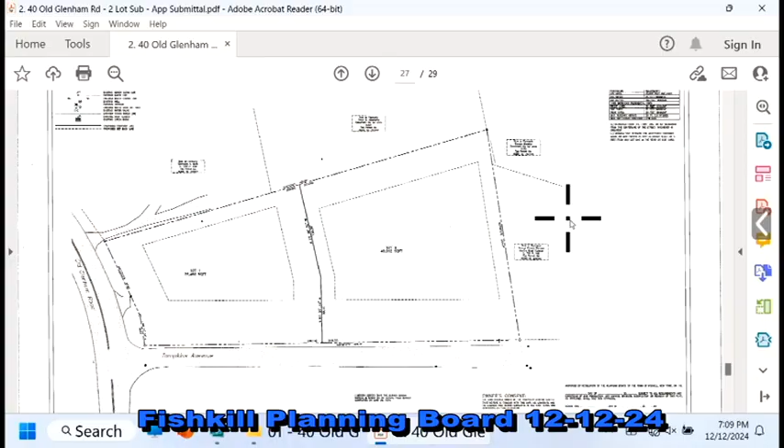Okay, thanks. Any questions from planning board members at this point?

All right, what I'd like to do is see a show of hands if there's anyone in the audience who would like to speak at tonight's public hearing. If so, I will read the rules of conduct for public hearings. I see a couple of hands, so I will read the rules and regulations for public hearings.

Speakers are asked to come to the podium and identify themselves so that their name may be entered into the record. Speakers are limited to 1 turn at the microphone and no more than 4 minutes, with a warning when 1 minute is left. Speakers should provide only new or different information; repetitive comments are discouraged. Speakers are encouraged to submit comments in writing so they can summarize during the hearing. Comments are limited to matters involving the business before the board at tonight's hearing. Verbal interruption, shouting, or other outbursts or obscene language are prohibited. That's good for now.

So there were a couple of hands up. Who would like to come up first to the podium? Again, please give us your name and address when you come up, and speak into the microphone if possible.

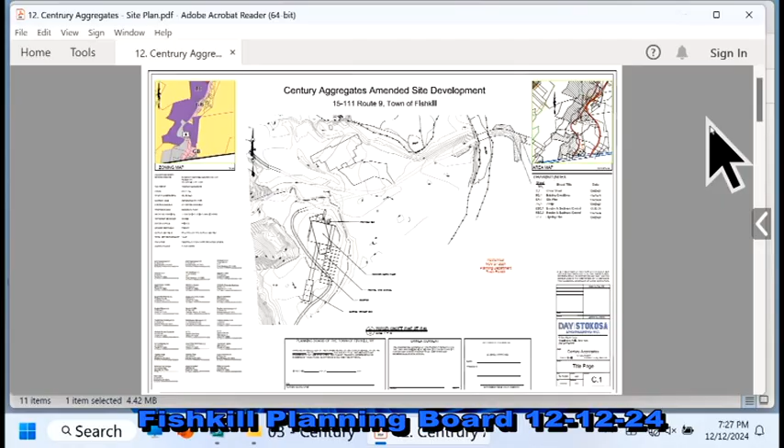Okay. And I'll mention that we did have a pre-application meeting with the applicant team probably a couple of months ago. So any questions from planning board members? No, not right now.

Yeah, this first meeting is really to accept and refer the application, so our consultants haven't had a chance to look at this yet.

Let's see, I'll give a couple of thoughts, and we talked about most of this at the pre-application meeting, but the entrance of the proposed facility being directly across from Carroll Lane will have to be particularly aware and sensitive to any possible impacts on that neighborhood, so that'll be part of our review.

I think we also brought up the question of whether state DOT might want to look at the traffic situation on Route 9 and see whether speed limits might be adjusted there, and or the possibility even of the installation of a new traffic signal at that intersection, which is now going to be used for more heavy-duty purposes than in previous years.

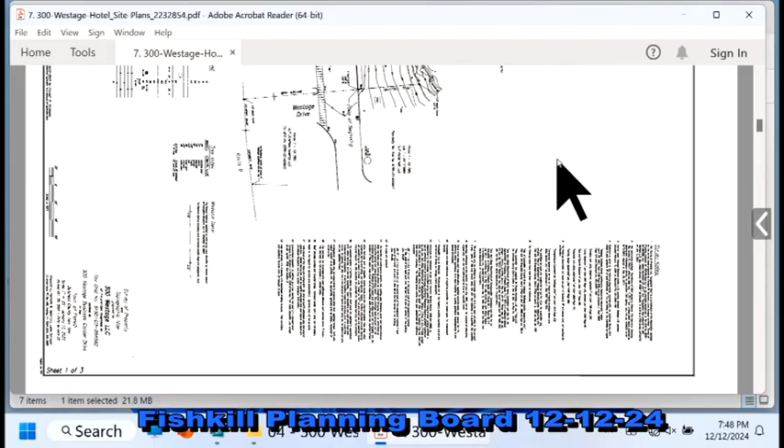Just to give a brief overview with the plan up: this project is located at 300 Westage. There's an existing 117,600 square foot office building that will remain as is.

We are confining the project area to a portion of their existing parking lot. This would be the southeast corner of their parking lot. Before we even got into this process, we did do a parking study because we knew that would be the driving factor here.

That parking study was submitted to the board. It's contained within the traffic study, which I'll also briefly summarize for you. The parking study was done earlier this year before school let out. The result of it was the existing office building uses, at maximum, 123 parking spaces.

Just to describe some of the decisions we had to make during the parking study: we understand you don't want to drive into a multiple hundred parking space parking lot and need to find that last space. So we did do a couple things that we think are a little conservative, just to give us a little bit of breathing room going forward.

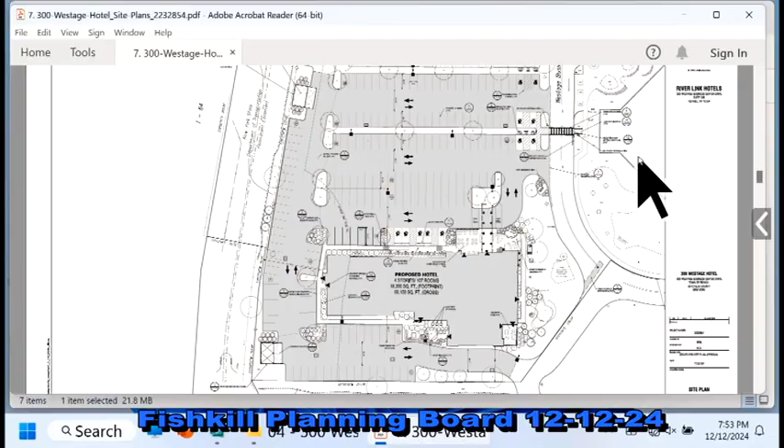As I also mentioned, the outside perimeter is fully within the existing parking lot. We have two landscape berms here, similar to the existing parking lot. We're replacing the trees that are being removed for the construction. Impervious coverage for the project is actually reduced from what's out there currently. It's a redevelopment project by definition, and we think there are some minimal impacts as a result.

We did do the traffic study, as I mentioned. The long and short of it is the build versus no-build scenario: the maximum increase in delay for any of the movements is less than one second.

And the study did take into account several of the other projects proposed for the area. So we did have the Continental Commons project, the warehouse proposed next to Home Depot, the Snook Road Medical Park, and Chick-fil-A.

I think those were just the main things we wanted to touch on tonight, knowing you guys have not accepted the application yet or reviewed it more thoroughly. So yeah, I think that's all we have. Neil, did you want to say anything?

Sorry, good evening, good to see everybody. I think the only question is, and I don't think you usually do this, but we acknowledge it's an unlisted action, so if you wanted to start the circulation process for lead agency, we'd be comfortable with that, but it may be premature, so.

We would normally wait at least until the following meeting, assuming this is referred to our consultants. That gives CPL an opportunity to review the EAF and make sure there's nothing missing, not to say there is, but to confirm that and provide them the opportunity to comment on the application and any adjustments that might be made prior to circulation.

And I think we'll probably want to be specific on the referral to CPL to make sure that the traffic engineer will take a look at the parking and traffic studies.

So there's 352, I believe, existing. We are reducing, of the 352, throughout the whole workday, the maximum use is 123. And then we took that number and said 123 parking spaces. So at its most utilized point of the day, they're only using about a third of their parking out there.

Yeah, so there is market demand. To go back to the height, real quick, 43 feet is well under the zone, which is 70 feet maximum. We did contemplate a smaller footprint hotel that was 5 stories, but our opinion, and open for feedback, was that a lower height consistent with the other hotels and other uses in the Westage Business Center would probably be more appropriate. So that's the main reason it's pushing us into the rear setback.

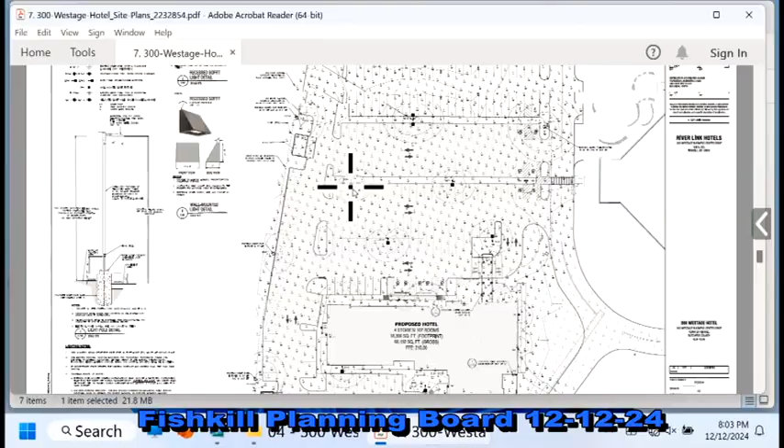And actually, thank you, because I meant to bring that up earlier and discuss that setback a little bit with you guys while we're here. It's just easier to see on the site plan, so excuse me real quick. There we go. So you can see here the setback is measured from the property line, obviously.

In this case, I-84 is located just south of the site, which, when you're looking at the plan, is the left side. The on-ramp to I-84 from Route 9 is located... sorry, this keeps popping up. It's essentially a curve that then connects to I-84 as an on-ramp.

The property line itself does not follow I-84 with a consistent offset. It juts into Westage here, but within that area it's essentially vegetation. So as far as maintaining a buffer to the property line, or to I-84 more specifically, if you were to draw a straight line, or even a curved line, it would give us even more space. With that straight line, you'd get a 100-foot offset for your setback, and we're outside of that. So the only reason we need a setback in this case is because this property line isn't shaped to follow the actual location of the highway.

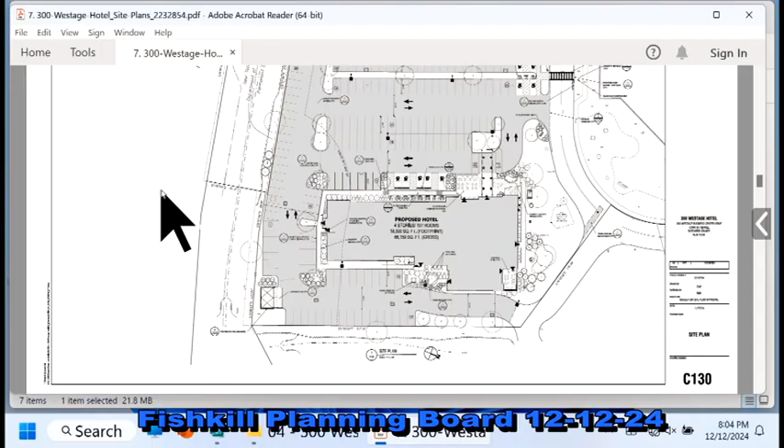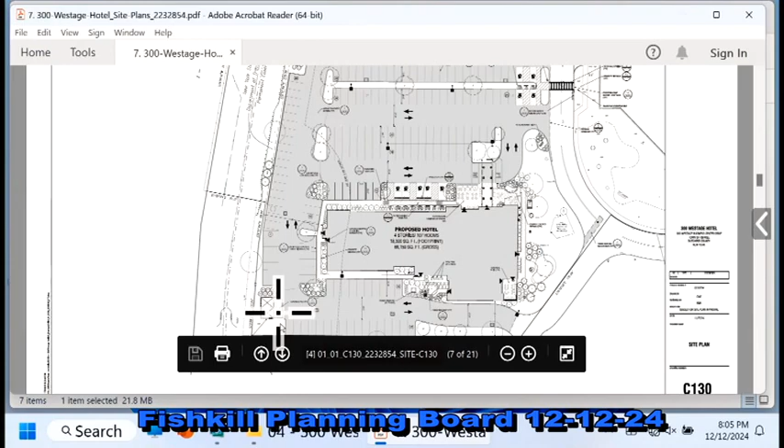So we'll definitely discuss that further and can provide figures that show it a little more clearly. But that's essentially what's pushing the building into the setback. If this setback went straight across the back of the property line, you can kind of see it here, it would come straight down within the drive aisle. I'm trying to just extend it from here, the rest of the setback, I should say.

So, if you want the applicant to speak more on the market need, he's probably a better person to talk about that than me. But I don't think the question is necessarily about parking. No, I meant the need for a hotel. Oh, another hotel? Yeah, yeah.

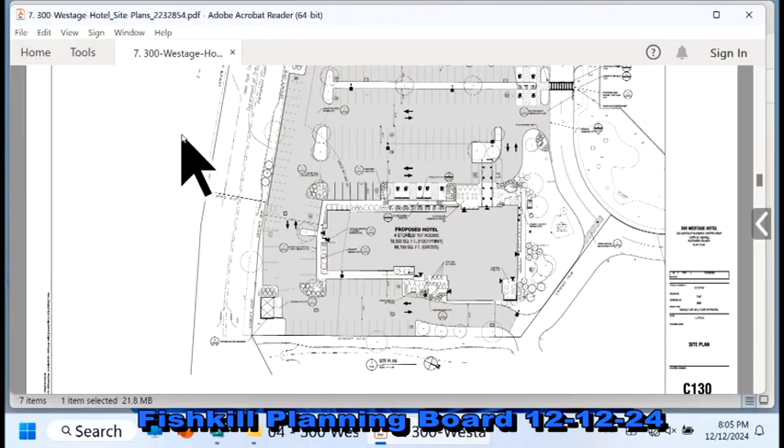Yes, it's a permitted use. Can I ask you about parking, because it goes back to parking? Sure. Because it's a homestay hotel? Home2 Suites, yes, which means they stay there for a longer period of time. Will that make a difference in the parking? Because a normal hotel, they're in and out,

and then you have that big gap during the day. No, it doesn't have much of an impact on parking. You'd think extended stay means they're staying a much longer time, and there ends up being longer stays, but only by about a day or two. Well, I was just thinking about parking though. Right, yep, it's a similar pattern as far as parking demand goes.

That whole side of Westage is going to be built up eventually. We have a lot going on over there. I just wonder, if we could fast forward, everybody in the town of Fishkill should be thinking about this. If we fast forward 5 years, when you're driving down 84 coming into Fishkill, what is it going to look like? We have potential storage units, the Gap, now another hotel, industrial complexes on the side. I just wonder, are we putting too much in a small space? It's a 5-pound bag. Are we putting 20 pounds of stuff in it?

Well, in this case, I'm very concerned about what Fishkill's going to look like in 5 years, 10 years, because a lot of these projects haven't even gotten started yet. Yeah, I can appreciate that, and that's, I mean, we think this is actually one of the best things about this project.

As I said earlier, the parking on the western side of our parcel that is on the 400 Westage property, we included in our count. So that is counted as office demand, even though there may only have been a couple people using those spaces that were going to the office, and the rest may have been to 400, but we didn't sit there and say, where are you going? So we just assumed anyone parked in those rows was going to be counted with the office.

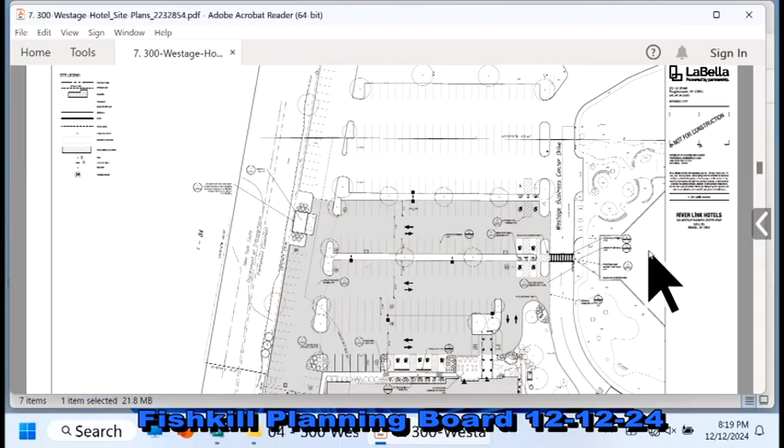And at the same time, anyone from 400 Westage who was using the parking over here was also counted with the office, because again, it was just any car parked within these spaces was assumed to be for the office. So I think that adds another layer, as I was saying before, we know we don't want to be 100% parked at any point. No one's going to be happy with that - the hotel, the office, anyone utilizing those 2 buildings won't be happy with that. So we did try to make conservative decisions every step of the way, where we could have gone with a different approach, but we didn't. But yes, more to discuss.

I just thought of this as we were exiting. Maybe it would be appropriate, even at this early stage, to let LaBella and CPL talk, especially as they're going through their review, to make sure that would be appropriate at this early stage. I think it might be helpful as to the advice you could get from your consultants on this issue in particular. Well, I think we'll wait till the next meeting to do those kind of things, because we haven't even referred this to our consultants yet.

Okay, but continuing on this talk about shared parking in particular, will there be some kind of legal agreements with, well, certainly with the 300? Well, it's all part of Westage, so it goes back to the Westage Association and the 5 or 7 amendments. So it's all encompassed. As you know, it's all one big, huge integrated site plan for the whole. So Westage obviously has to sign off on what we're doing as an association.

Bobby has an agreement with the building owner of 300, who owns 300 as a whole, right? They own all of this. That's how this came about, for the appropriate ground lease agreement in order to do the project. So they're fully aware, invested, and I think they signed the LOA with our application package, if I remember correctly. So this is very out in the open, and Westage is fully aware.

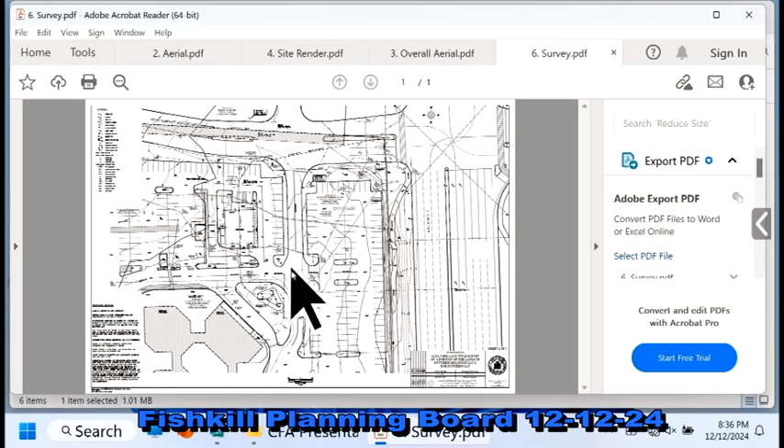A really inefficient layout with the existing conditions is there's actually this landscaped island in the middle of an access drive here, an access drive here, and you can count how many intersections and turning movements there are right in this narrow area. You've got cars turning here, here, here, and here. 4 intersections being replaced by 1. So another significant traffic safety, vehicle circulation improvement as part of this project.

And now we've got this larger area for our use. And again, we're utilizing an area that's currently developed. It's an existing parking lot. In our application with our traffic study, we submitted a parking utilization study. It's a very underutilized area of parking lot that we're able to utilize for our use.

What we really like about this layout is it's the isolated drive-through layout rather than your traditional drive-through. A traditional drive-through is the building's in the middle of the site, the drive-through wraps the building, and then the parking lot is around the perimeter of the site. Anybody who parks has to cross the drive-through to get into the building.

With an isolated drive-through, you can try to limit that crossing of your parking dine-in guests and the drive-through activity. So with the isolated drive-through, you can come in, approach the drive-through, navigate around the perimeter of the building and out. And then a large area of your parking field for your dining guests, you can park, go in the store, grab your food, dine in if you want, and get back to your vehicle without having to cross that drive-through traffic. The other benefit of an isolated drive-through is your drive-through is now on the perimeter, not your parking, so you can really maximize that drive-through length and your queuing capacity in the drive-through.

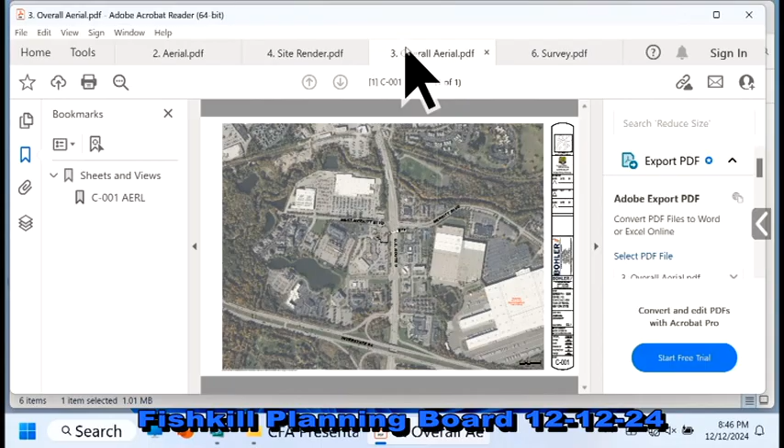You've already placed your order on the app. The question, when you're talking about that third lane in the space there, I also saw in the county thing, and you can see they always question, because the sidewalk ends just as it turns and stops. Now they're asking to see about a sidewalk going along there so you can walk all the way across and into the site. So would that impede on the space of your third lane? Because they also want to see some vegetation or trees or plant boxes, tree boxes they were talking about. So I don't know if that encroaches onto your plan.

Can you accommodate a sidewalk? Yeah, actually, let's talk about that, because I was interested in that suggestion. Yeah, so it's tough to see here. This is just an aerial of the Hudson Valley Town Center.

So there's sidewalk along Route 9 out front. What we're proposing to do is connect that sidewalk into our site and our store frontage, so the store has connectivity out to the existing Route 9 sidewalk. And then we're also carrying that through into the town center, so we'll have another pedestrian connectivity, ADA accessible path here. We're providing that connectivity both from Route 9 to our site and also the town center.

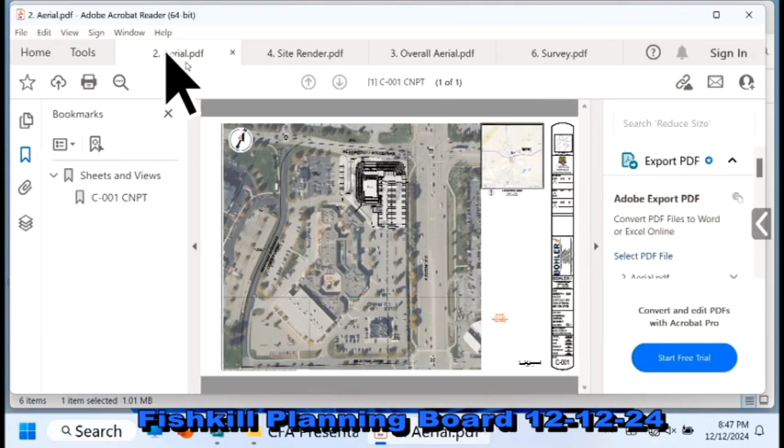The county comment was, okay, to your point, take the sidewalk here and let's extend that down West Merritt Boulevard as well. Turning, you'd be walking into the head-on traffic leaving the plaza. Right. So if you look at this aerial, there's sidewalk here that continues across the intersection of Route 9. There's sidewalk along the eastern development here.

I saw your cut-through sidewalk going on. Yeah, and then there's integration here. So when this, I think it's Dunkin' Donuts, yeah, when Dunkin' Donuts was developed here, they didn't extend sidewalk along that frontage there.

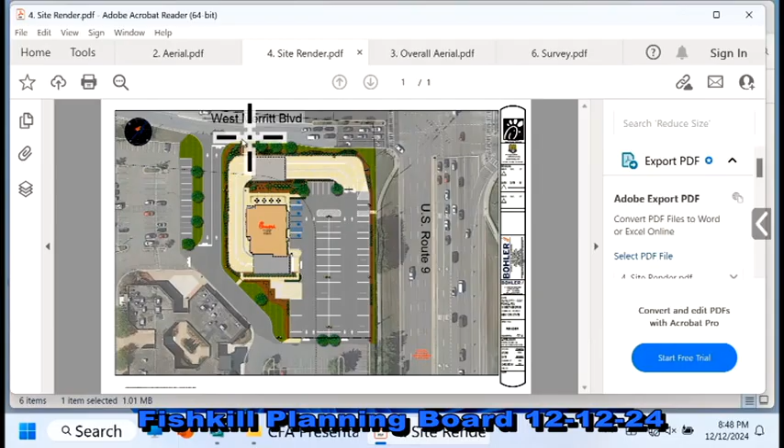So we would essentially be extending that pedestrian connectivity to this driveway, and it would leave a gap. This driveway is also heavily utilized by the vehicle traffic that's coming into the site, and it's a busy intersection. We don't feel that this is the best place for that sidewalk connectivity. We feel the sidewalk connectivity through the town center and out is more appropriate, as we have shown, but it's certainly an item for discussion here, and the county brought it up, so we can certainly talk about it.

But to your exact question, is it going to affect the drive-through? I imagine we could still put a sidewalk connection through here and not impede the drive-through.

I'm not trying to say that's what they're thinking, but going back, there's hotels, medical offices, stuff, and I don't know if you've ever seen it, but people come out of those hotels and crosswalk across Merritt Boulevard there, because they want to go to Walmart. Right. And they want to come up, and now they're thinking they want to walk up to Dunkin' Donuts that's there, and they can walk further up to your restaurant.

So I'm wondering if they're trying to see about the sidewalk continuing all the way back towards the hotel. I don't know if there's any information we can look into further. I'm sure it was discussed during the Dunkin' Donuts review, about why they connected on the southern side before connecting to Walmart there. But our goal was to provide that integration. If there's another thought to do so, we can certainly talk about it.

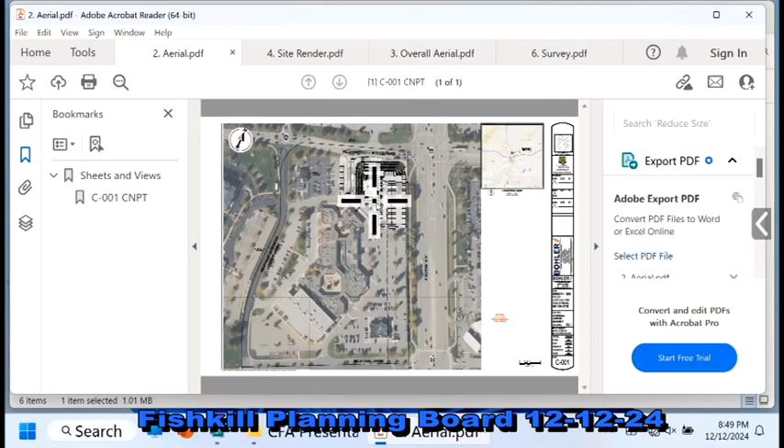What I would be mindful of is we don't want pedestrians crossing this drive-through anywhere. So if there is pedestrian connectivity along West Merritt Boulevard or into the town center, we need to provide some type of fencing or buffer from the sidewalk to the drive-through, because you don't want a random opening of pedestrian traffic coming through. We want to really isolate that to the frontage and not through the vehicle queue.

The county also made a comment regarding the proposed crosswalks connecting the sidewalk on Route 9 to the building, coming through the parking lot. The county is suggesting that striped parking area could be curbed to make it a little more distinguishable. And that's, I think, a good suggestion to look into.

Right here, there's the end of the parking stall island. That's just striping right now - pavement with striping over top of it. That's needed just for the truck turn movement; the delivery truck will still come in here and turn around. We could certainly do some type of mountable curb situation that makes it a little textured or different than the pavement, to help from a pedestrian safety standpoint.

Yeah, we think we can certainly look into that. I think that would be the idea.

So where does the truck drop off their food - in the front part or the back part? For deliveries, they would stage out in front of the building here, and then hand cart the deliveries to this back door.

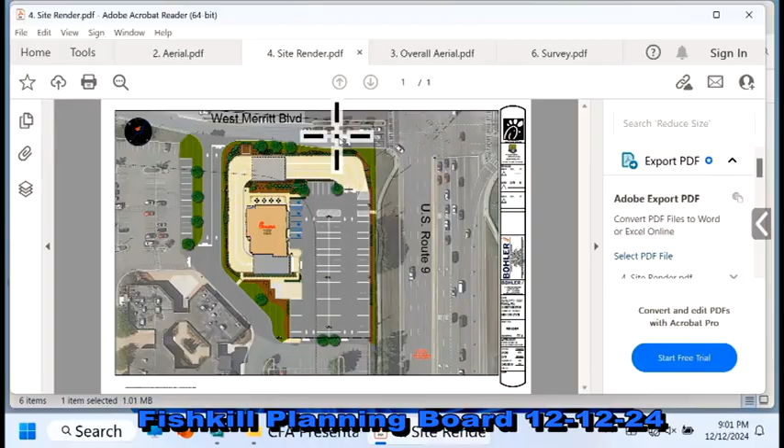No, that was very helpful. I'm very appreciative that you provided these presentation plans, because they're really a lot easier, not only for the board, but I think for the public, to see what's going on with the site. Yeah.

Meanwhile, why don't we go right to CPL's memo, and John, if you could go through that quickly. Sure. As far as SEQR goes, assuming Dominic agrees, we believe this could be classified as an unlisted action.

I agree, so that's something the board could consider doing this evening. Our comments are - there are a number of them - but many are more housekeeping items, asking for additional details on certain things.

I will say they did a really good job on their SWPPP. We only had a couple minor comments on that.

Unfortunately, our traffic engineer was not able to complete a review of this application in time for this meeting, so that is something that will be coming with the next review. Unfortunately, we just couldn't get it in for tonight.

In regards to traffic, we have been coordinating with New York State DOT for their review of the traffic impact study as well.

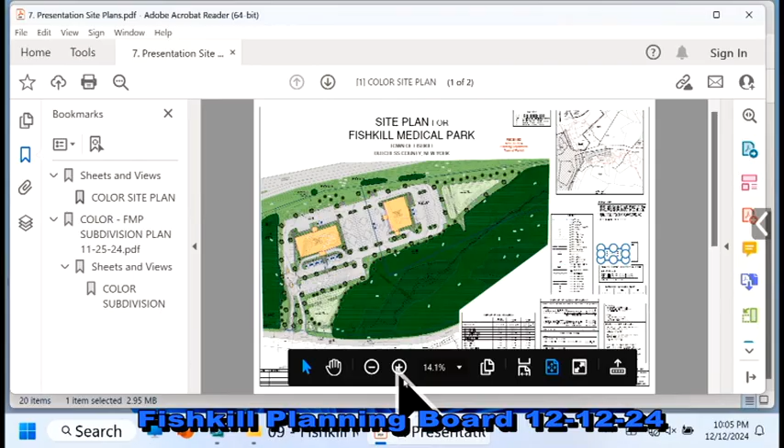There was a concern raised about two means of entry into the project, so we've essentially divided that entry, given a boulevard entrance. So you have an entry and an exit lane there. If one lane gets blocked, you've got adequate access into and out of the site, both for the people who work there or emergency first responders needing to get in or out. It's just kind of a safer way to manage that traffic flow.

Other than that, the project has really remained static. We've added some nodes, we've added a little landscaping, we've updated the SWPPP. We've started to work through some of those engineering questions and comments, but from a plan perspective, that's really the majority of what was changed.

Any questions or observations from planning board members before we ask CPL to go through the memo? All right, not right now. Okay, well, why don't we ask Liz and John to summarize CPL's memo and take it from there.

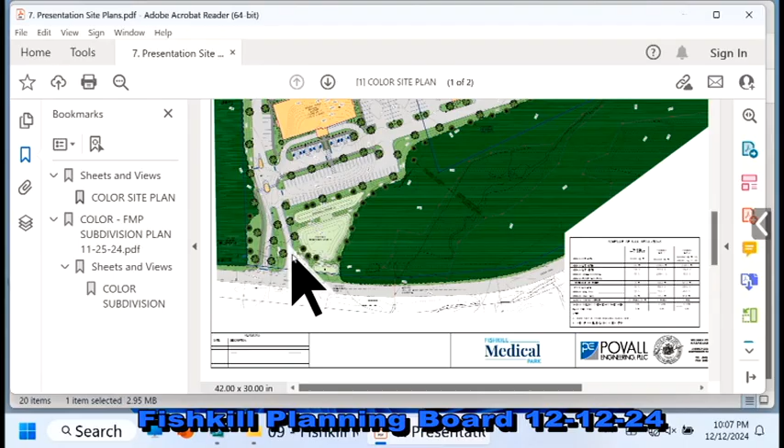Okay, so I have to say it was refreshing to have such a responsive submittal. I was pleased to see a lot more information on the plans. I'll get into the nuts and bolts a little bit, but I felt like this submittal was comprehensive enough that I was able to dive into looking at the subdivision a little bit more, and I think we have a little bit more information in terms of possibly taking a step on SEQR review.

For example, I believe this could be classified as an unlisted action, and the board might consider initiating circulation for lead agency. So that's one consideration for tonight.

One of the comments I had made before had to do with connecting people and places, and prior comments asked for sidewalks to be constructed from the site driveway along Snook Road to the other nearby businesses. So there was progress made there in terms of internal sidewalks coming out to the driveway.